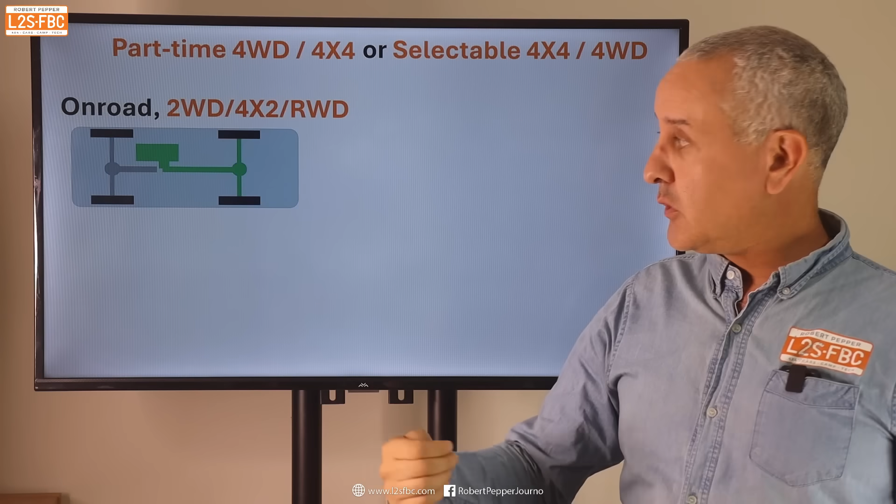So to understand the difference between 2H and 4A, a bit of background. There's something called part-time four-wheel drive or part-time 4x4, otherwise known as selectable 4x4 or selectable four-wheel drive. That's demonstrated by this diagram here, which shows an engine, and the green means the rear wheels on the vehicle are driven and the front wheels are just freewheeling around. So it's a rear wheel drive or two-wheel drive.

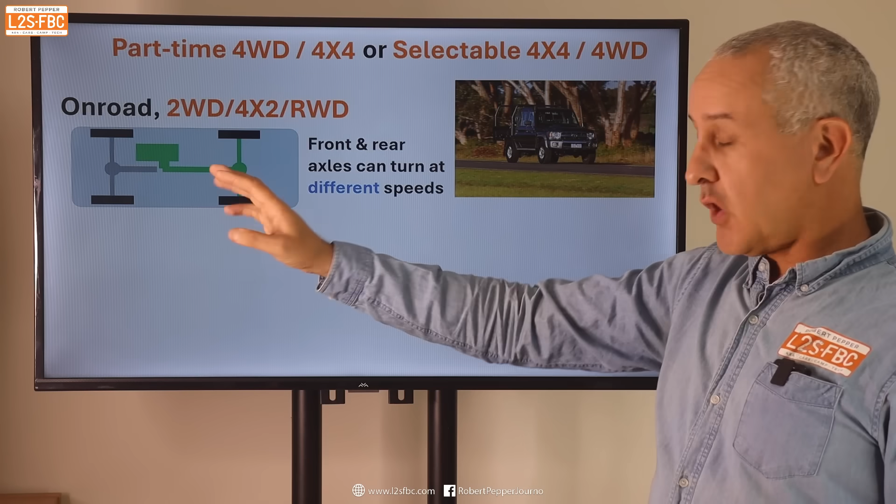The front and rear axles can turn at different speeds when the car goes around a corner, and that's used on surfaces like bitumen because you've got high traction. When you go around a corner you need the front wheel to turn quicker than the rear wheel, and just by driving the rear wheels it allows that difference in front and rear axle speed.

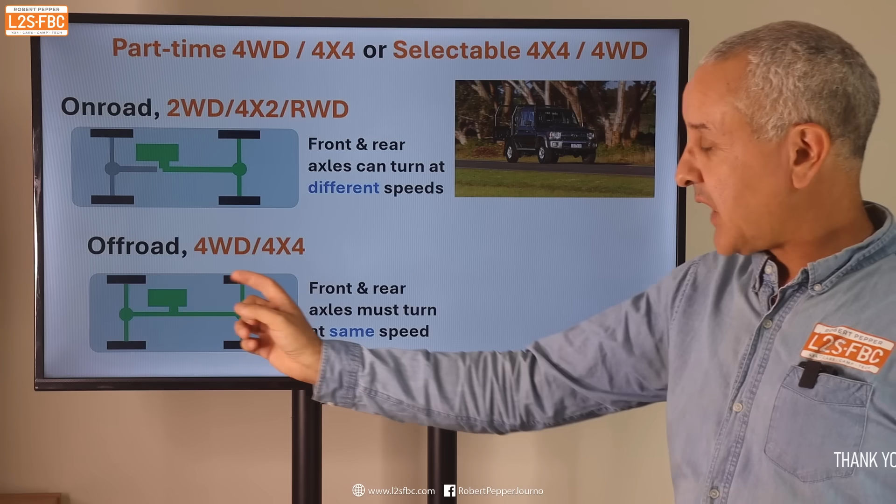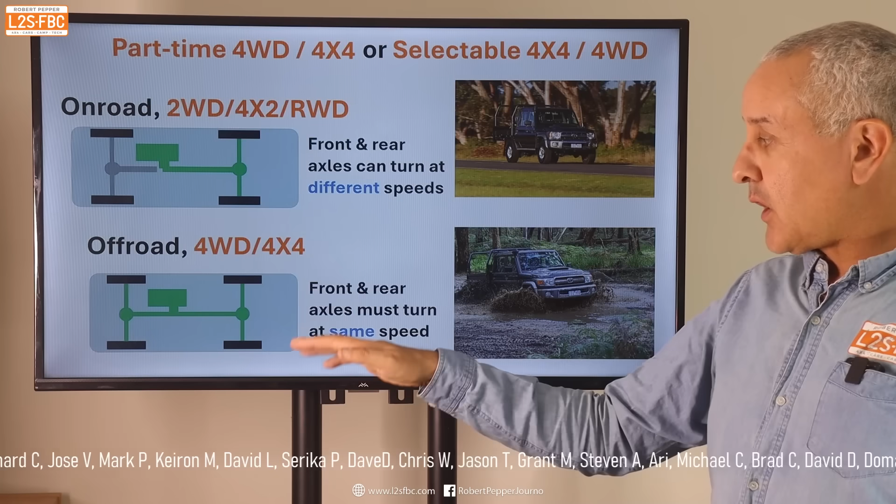Now when we're off-road, that is a low traction surface and we can actually lock the front and rear together. We put the vehicle into four-wheel drive and now we're driving all four wheels, so the front axle must turn the same as the rear axle, and that's the sort of terrain we use off-road. Vehicles like the 70 Series here actually run in two-wheel drive, driving the rears only on bitumen roads, high traction surfaces, and are only four-wheel drive in off-road conditions.

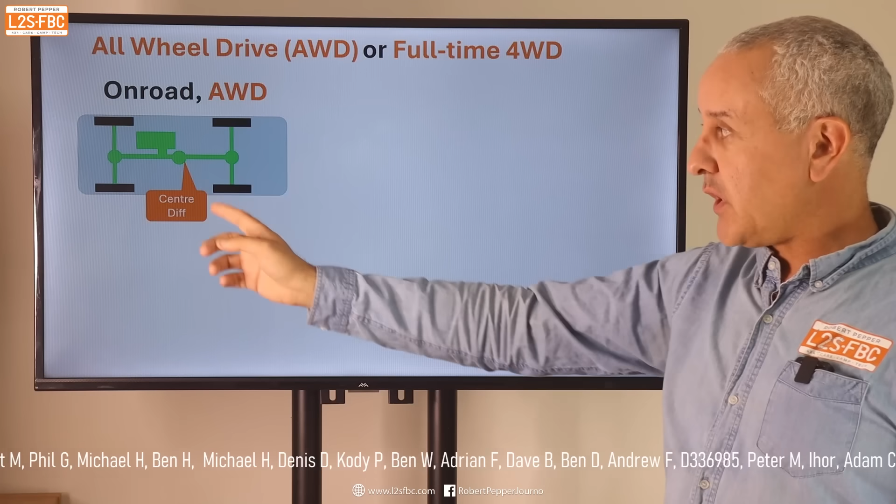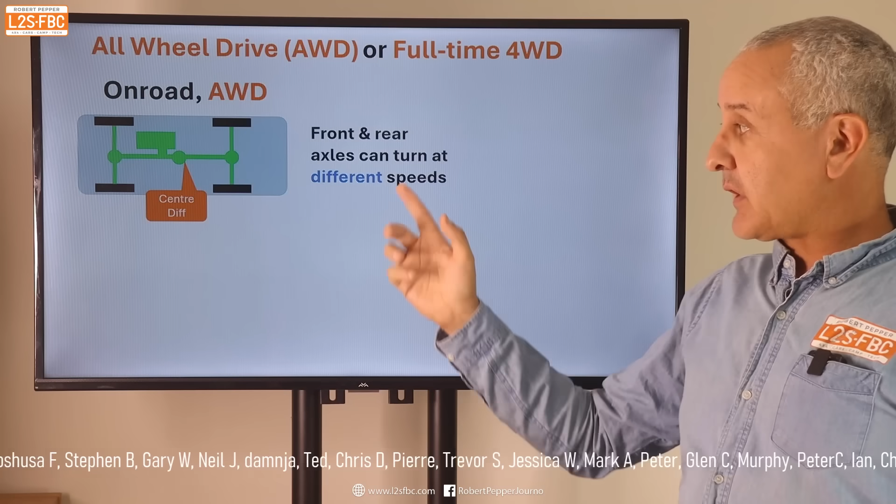Then we get to all-wheel drive. That starts off similar, but for on-road purposes we've got something now called a centre differential, and this means the engine can drive all four wheels, the rear axle and the front axle, but the centre differential allows the front axle to turn quicker than the rear axle going around a corner. So the front and rear can turn at different speeds, yet both are driven by the addition of a centre diff. Sometimes it's not a centre diff, it's a centre clutch, a viscous coupling, but we'll call it a centre diff.

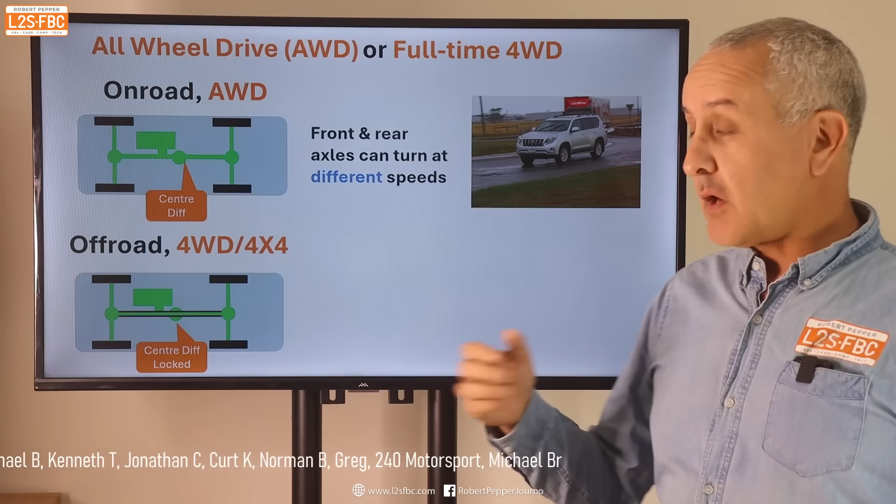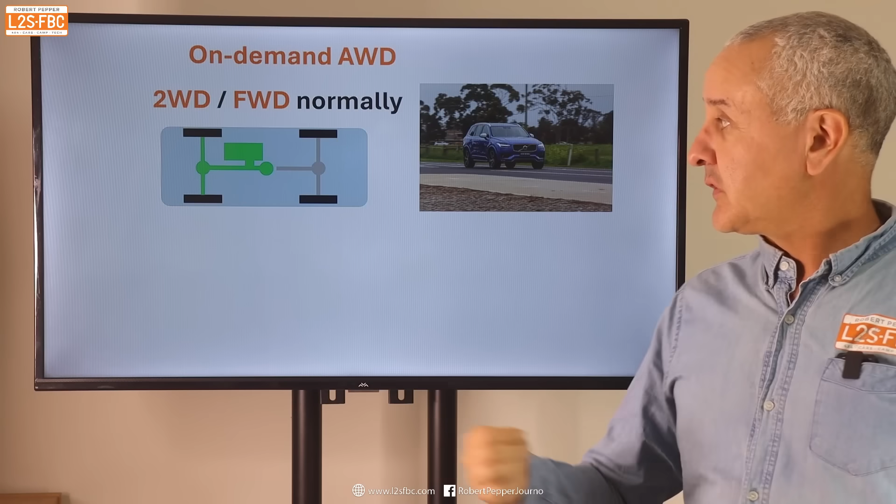Then we get into something called on-demand all-wheel drive, and that is typically driving the front wheels, meaning the front wheels are driven by the engine. We do have a centre diff here, but the rear wheels are generally just trailing, not doing anything, and they are driven when it is required.

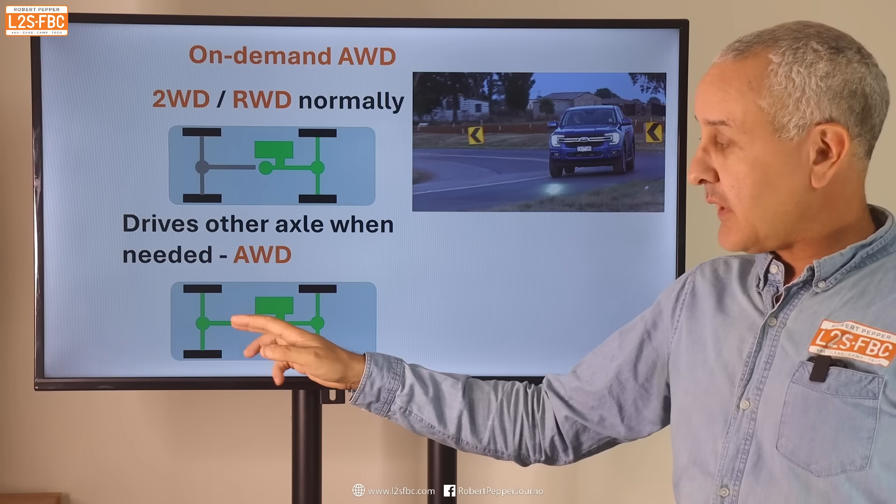For example, if we take this Volvo, off-road now, or semi-off-road on a dirt road, it would now need to drive the rear axle, so it would bring that rear axle into play. Essentially it's mostly a front-wheel drive, but the rear axle is driven as and when required. That's your on-demand. We can also have on-demand on the rear as well, and that's actually what the Ranger has, because in 4A mode it drives the rear wheels all the time, but it will bring the front axle in and drive the front wheels as and when it needs to.

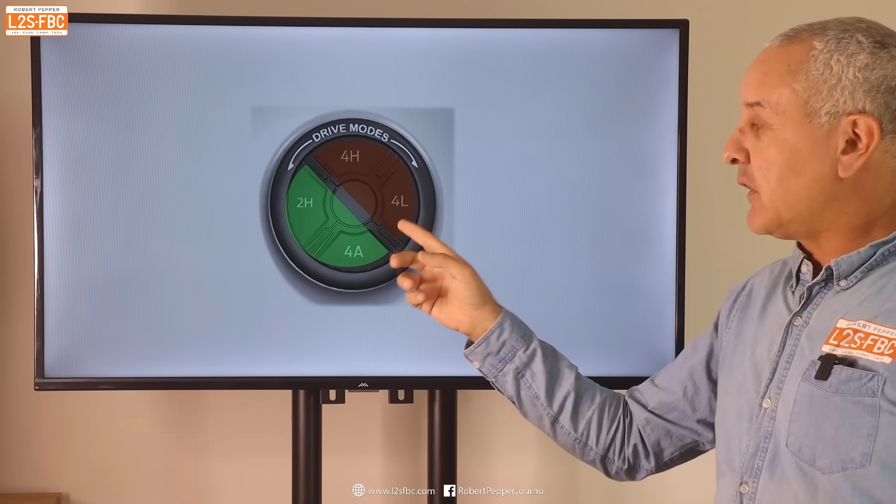Now let's talk about the drive modes and how they work. There's 2H, 4A, 4H and 4L. We can split them up: these are your road modes, the 2H and the 4A, and the 4H and the 4L are your off-road modes. I'm not going to go into the off-road modes at the moment, we'll talk about the road modes.

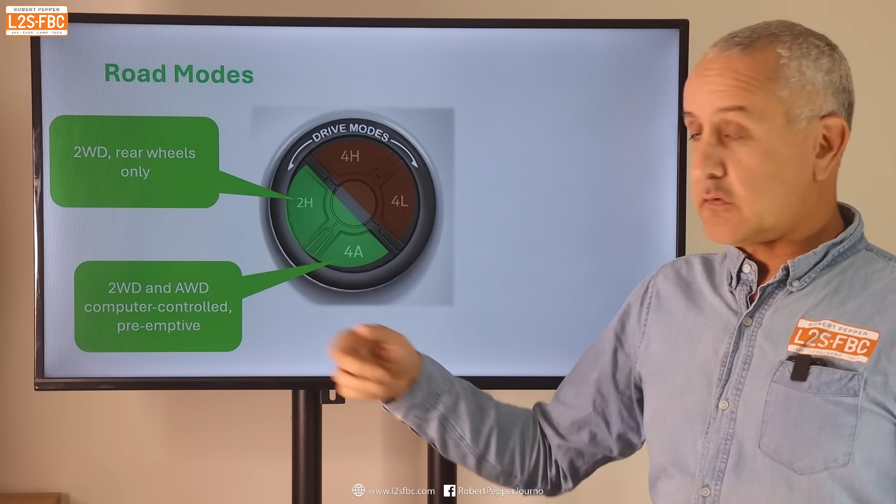So this is 2H, it drives the rear wheels only, and 4A, that is two-wheel drive and all-wheel drive. It will drive two-wheel drive all the time and bring that front axle in as and when. The off-road modes over here will drive four-wheel drive, all four wheels all the time. There's no disconnecting into two-wheel drive, and that's locking that centre diff. 4L is the same, but that's in low range, and that's your crawler gear. The only difference between these two is that it's a lower set of gears.

All right, so how does Ford's 4A system actually work?

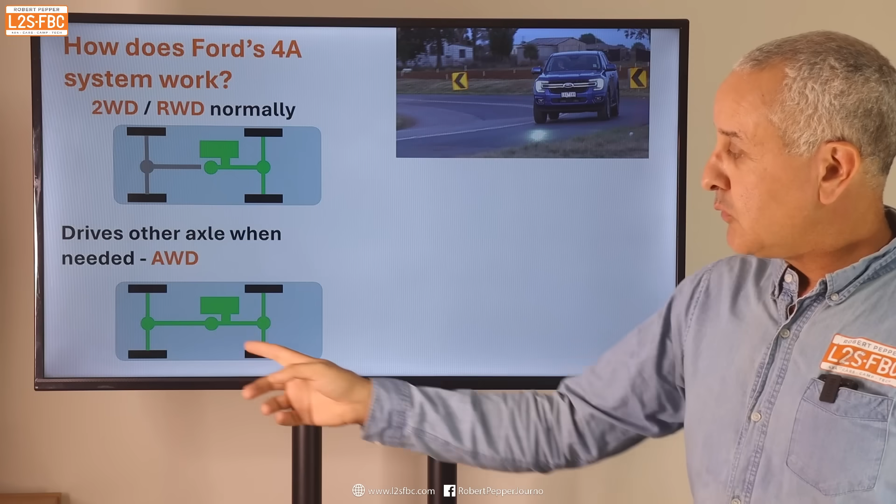Well, this is its kind of normal mode, and it's just driving the rear axle, absolutely nothing else. But it will bring the front axle into play in certain conditions.

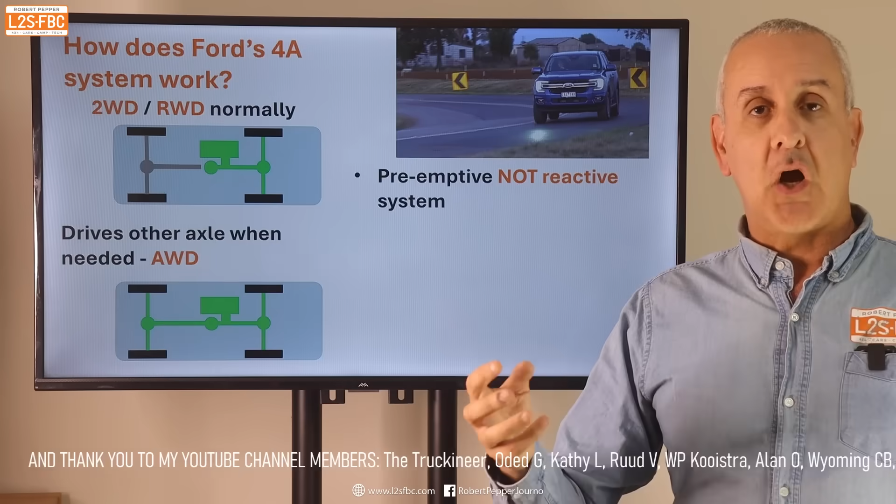And those certain conditions, from driving my own car, I've noted that it's actually a preemptive system, not a reactive system. One problem with many previous systems was that the car would wait for the front or the rear axle, whichever one wasn't driving, to slip, and then it would send torque or drive over to that axle. And that was always a lot less than ideal, because by the time it's slipping, you're in trouble. Well, the Ford system is preemptive.

So if you accelerate away, you'll always seem to do that in all-wheel drive, never in two-wheel drive. And the only time you'd be accelerating in two-wheel drive when you're in 4A is at relatively high speed, about 80 k's an hour or there above, at small throttle movements. If you put your foot to the floor, it'll go to all-wheel drive. So you get all-wheel drive when pulling away, accelerating, cornering, and it comes in before there is any actual slip, and that's really good and important.

And even when you are downshifting to go down a hill, you can see that that downshift rev match is actually put for all four wheels. And it's almost like the default is all-wheel drive, and it only disconnects that front axle when the vehicle is in some form of relatively high-speed cruise. And to me, it feels very much like a true all-wheel drive system where the front axle never disconnects. And trust me, that is high praise. I've driven a lot of these systems, and I do not say that about all of them, but this one I feel is in effect a true all-wheel drive system.

So what does Ford say about it? Well, this is an excerpt from the manual. When you select four-wheel drive auto 4A, the system continually varies power to the front wheels for optimum performance in all road conditions, which is effectively what I've just said in more detail.

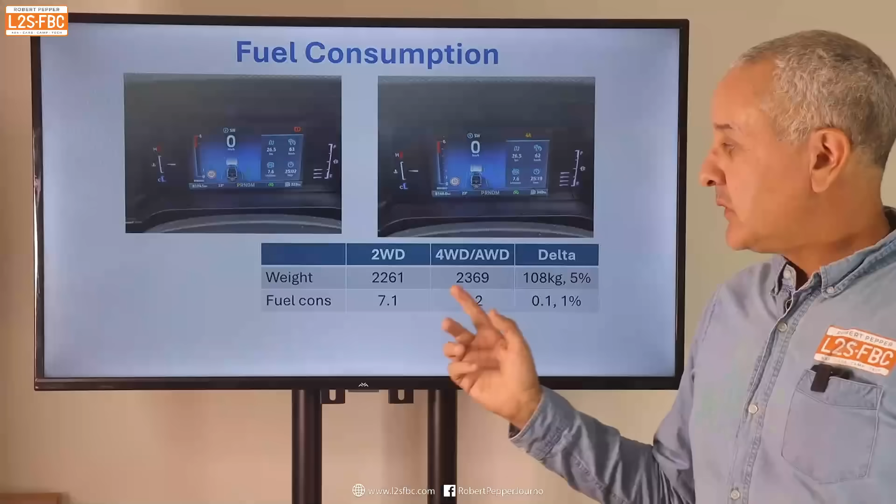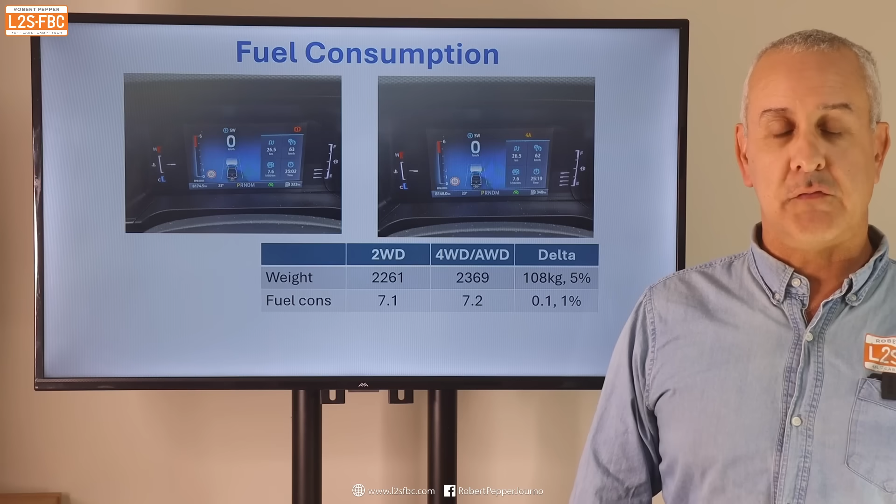Now, if we take a Ford Everest, two-wheel drive, four-wheel drive, and look at the delta, the weight difference between the two-wheel drive and the four-wheel drive is 108 kilograms. Why? Because the two-wheel drive version does not have a front differential or drivetrain or anything else. It's literally missing those components. So it's over 100 kilograms lighter, and that means it doesn't have any friction either.

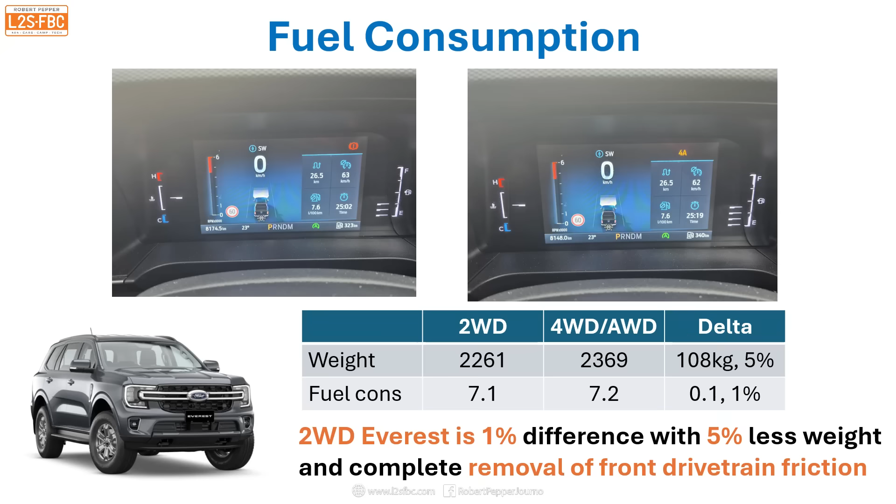Here's a GoPro under the front of the Ranger, and you can see everything is still turning. You're carrying that weight, it's going to be going around anyway, so you may as well use it to get extra traction. Why would you use 2H or 4A?

Let's go through the pros and cons. So the pros, better on-road grip.

Simple as that. If you pull away in wet conditions, even in dry conditions, particularly when cornering, you're less likely to get wheel spin. You can put your foot down and the car will just go, which is great.

Towing is handy as well. You'll get better traction when you're towing, and trailer manoeuvring. When you're manoeuvring heavy trailers backwards, that definitely helps as well.

Campsite and grass, if you're going around in low traction conditions on grass and so forth, then you can do that in 4A mode, and that will be fantastic. You're not going to rip anything up like you would in 4H, or suffer a loss of traction in 2H.

Engine braking, that can even help as well. Coming downhill, it's actually engine braking all four wheels.

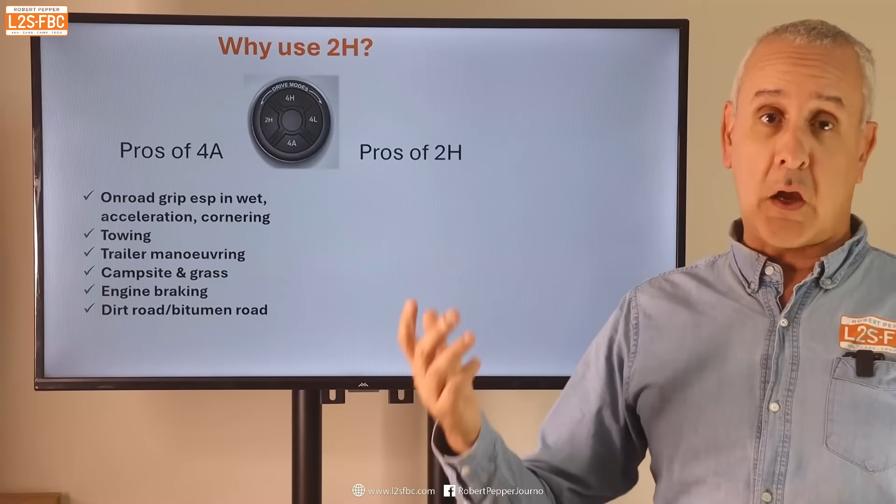And dirt roads, when it goes from dirt to bitumen and back again, that's really good as well, because then you're not going to worry going from two-wheel drive to four-wheel drive. You just get that good traction all the time.

So my view is just leave it in 4A unless you want to drift, because I think that's really the only advantage of 2H. If you deliberately want to hang the back out, I can't really think of any other advantage. Fuel consumption certainly isn't one.

So to demonstrate the traction difference, that's in two-wheel drive, and is the same again in all-wheel drive 4A.

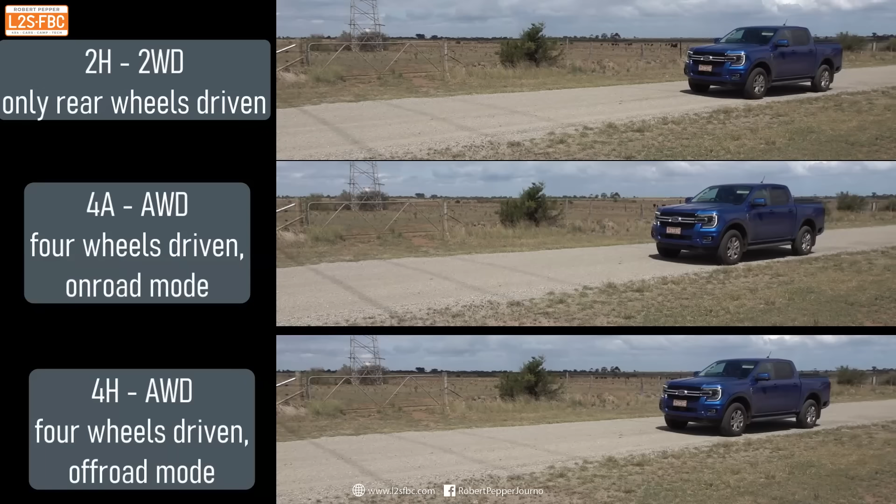But what about the understeer? People say this - oh no, it feels like understeer in all-wheel drive. Well, I don't think it does. Aside from four-wheel drives, I do a lot of sports car work and racing, and I don't really feel it's understeering. But let's talk a bit about it.

It's not going to make any difference on corner entry when you're braking and turning in - it's going to be the same, 2H or 4A. The only difference it's going to make is when you are exiting out of a corner, putting the power down. And if you're wanting to rotate the back around under power, first of all, you shouldn't be doing that on a public road. Secondly, it's really hard to do in a Ranger because it's got an open diff.

If it was an LSD, so much the better. But the best way to launch out of a corner in Ranger or Everest, which has this mode, is to put it into 4A and use all four wheels to come out of the corner.

If you're getting chronic understeer, that's a you problem, so you need to learn to drive around it. And the other thing is that every single car on the market, Ranger included, even the sports car, is tuned for inherent understeer. That is the safest way to do it, and that's the way it works.

So for me, I think you're just going to make quicker and safer progress in all-wheel drive. This business of it's understeer, for me, that's just a complete non-issue.

Now I want to talk briefly about freewheeling hubs and part-time four-wheel drive as to where that comes in. So this is typically what would happen if a part-time four-wheel drive was put into two-wheel drive. You can see the front axle is not driven at all. Now with the hub set to free, in effect that disconnects the wheels from the front axle, the diff, and the front prop shaft.

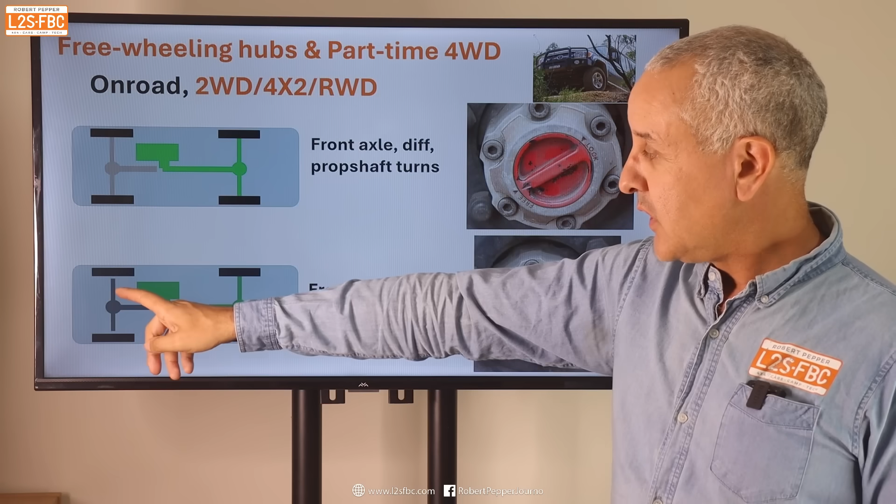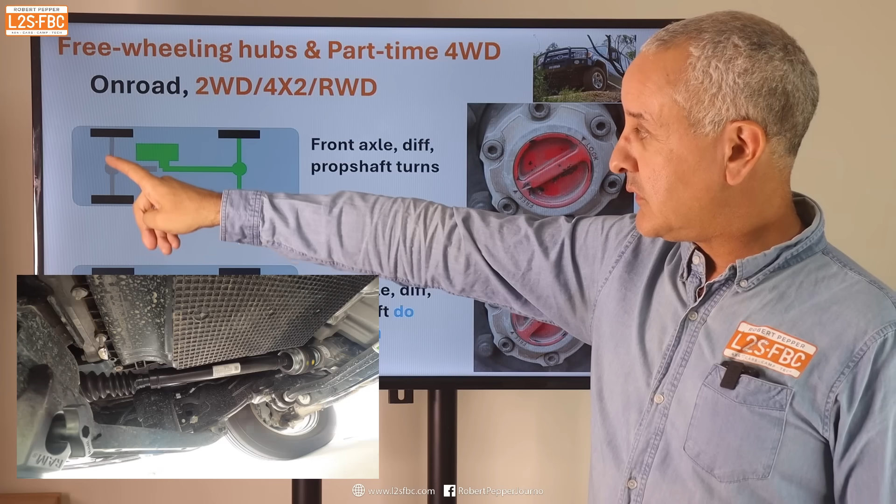And that means that these components here do not turn, so you don't get the frictional losses associated with that. This is where you might get a tiny increase in fuel consumption, because what the Ranger has, and many other vehicles, is that the wheel turns this, so even though it's not driven by the engine, it's still going around, it's still using energy.

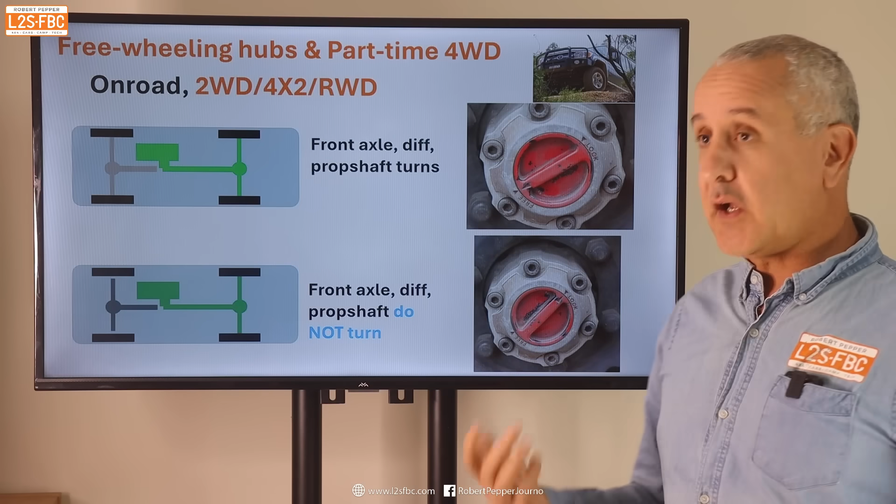With freewheeling hubs, we're isolating all of that so it doesn't turn, so you actually do save a bit of petrol. So if you really wanted to save a bit of fuel, you need to fit freewheeling hubs to your 4A Ranger and drive it in 2H and set them to free. But I really don't think that's worth doing.

Now, this system that Ford has is not new. It's very similar to things like Mitsubishi's Super Select, where you had 2H, 4H locked as they call it, and then low range - essentially the same thing. The difference with Super Select is that in 4H it drove all four wheels all the time, whereas the Ford system is clever and will disconnect the front drive shaft or reconnect it depending on what the vehicle is doing. But essentially it's the same sort of system, and there are others apart from Mitsubishi's and Ford's.